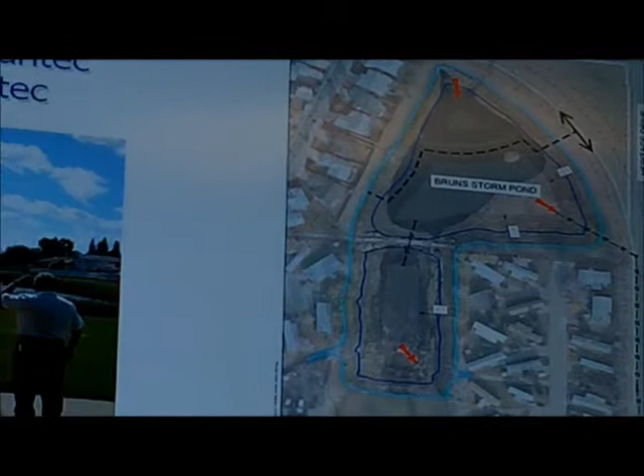Thank you, Matt. Mayor and Council, I'd like to thank Council for inviting us here tonight to share the results of our stormwater study and the path forward to resolve a lot of the issues that have occurred in Lacombe with the recent flooding. With me is Brad Dartis, one of our senior stormwater management experts, who will go through the presentation. We also have Mike Mushins, one of our senior municipal engineers who has participated in this study. They also attended the open house with residents a couple weeks ago. I'll turn it over to Brad. Mike and myself are here to discuss anything after the presentation. I look forward to questions.

You bet. Just before you do that, I want to welcome you, Todd and Brad. Thanks for coming out tonight. I know you've got two spots on the agenda here. What we'll do is bring this one forward, and we have a public hearing at 6:30, and we'll bring you back for your second one after that. So welcome, and looking forward to hearing from you.

Thank you. Good evening, thanks for having us. My name is Brad Dartis. I'm here to talk about the 2012 Stormwater Management Plan, and also how that leads into the 2012 Capital Works Plan. We'll start with some background on the flooding issues the city's been experiencing, then go into detail on the 2012 Stormwater Management Plan, and give more detail on the Capital Works Plan.

The goals of the Stormwater Management Study are to increase the level of service for both stormwater and sanitary servicing, mitigate the potential for property flooding, and also support overall environmental stewardship.

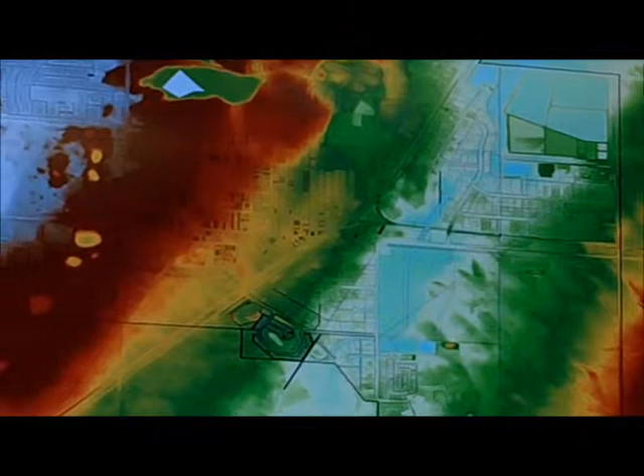Part of the model construction was we took the topographic data, which was actually from LiDAR data, along Wolf Creek there, and then as you go to the west, the red areas - that's the higher parts of the city.

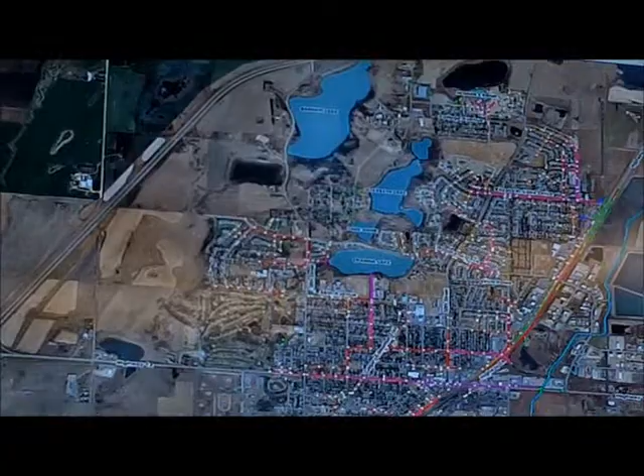The next step in building the storm sewer system, the minor system, we created the pipe elements in the model.

That one shows the entire minor system for the entire city, so of course it's hard to make out too much on that.

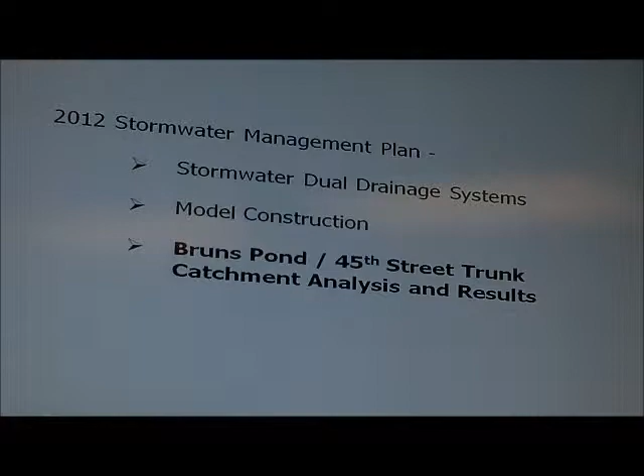So now we'll go into the specific analysis that we did of the Bruns Pond and 45th Street trunk. That was the system that was targeted for this year's capital works.

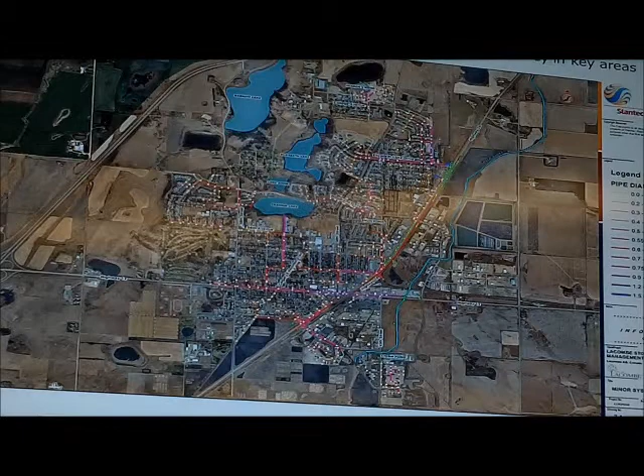Sorry about it, it wants to keep going backwards on me once in a while. I don't know what I did. Scrolling forward and then scroll the other way. I'll just scroll from now on, thanks.

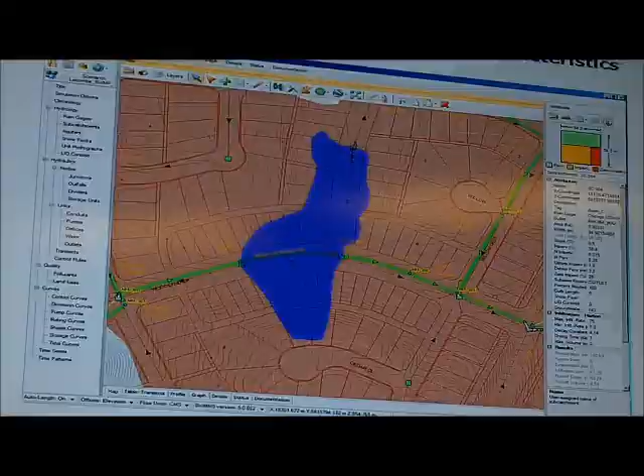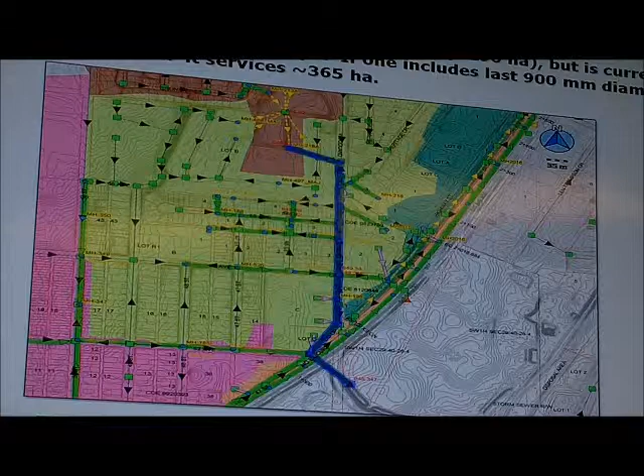All right, so the 45th Street trunk services about 290 hectares, but it's currently a 600 millimeter, or 2-foot diameter, pipe. And if you include the last pipe run, going northwest to southeast that crosses Highway 2A there, that pipe is 900 millimeters, and if you include that pipe run, then that trunk services 365 hectares.

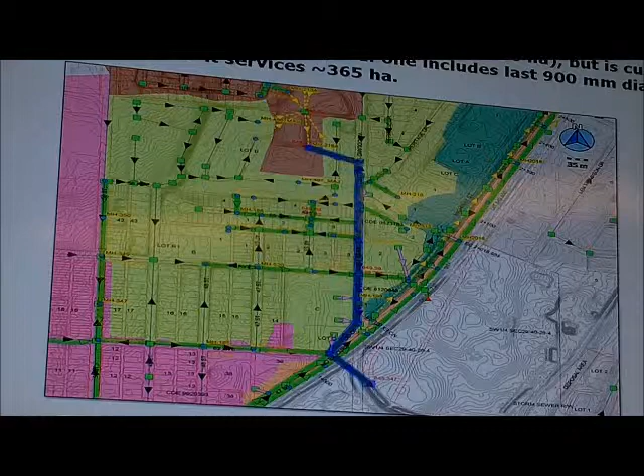So if you go to the next slide, in the model, the area highlighted in blue is the 290 hectares that the 2-foot diameter pipe services, and if you include the last 900 millimeter pipe run, then it also includes that pink sub-basin there. So that is quite a large area to be serviced with a 2-foot diameter pipe.

So it was obvious that we needed to analyze that further to see if there were any issues associated with it. So the next slide, we're going to show a profile along this alignment here, the one highlighted in blue. That's the 600/900 millimeter pipe trunk.

So this is the results from a modeling run for the 1-in-100-year design storm, which is what you would typically design an urban storm drainage system for. And so it shows the pipes in there, full of water, of course, and then it shows each of the manholes going up to the surface there.

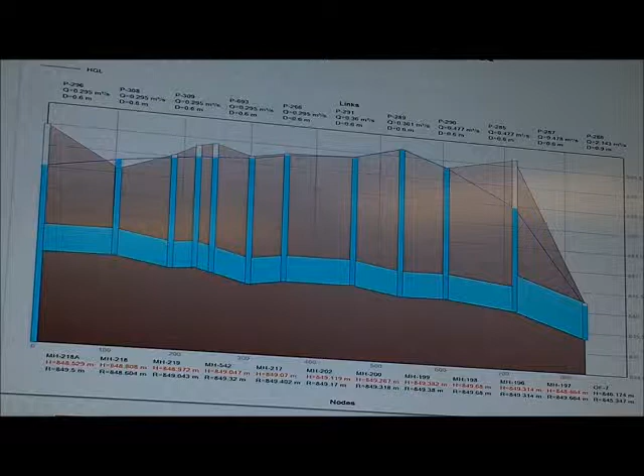There's also a light blue line that traces through the top of the water surface in each of the manholes, called the hydraulic grade line of the system. That's basically where the ponded water surface occurs along that particular profile. So as you can see, it's right up to the surface for most of that pipe run, and that doesn't leave a lot of capacity for stormwater to get into it and be conveyed away.

So what we have modeled is the addition of a new storm trunk that pretty much goes down the same alignment. It goes a little bit further north, up into Bruns Pond, along the roadway rather than through the trailer park there. This proposed trunk's southern half is about a 1200 millimeter pipe, so about a 4-foot diameter pipe, and towards the north we're pretty confident we can reduce it down to a 900 millimeter pipe, so about a 3-foot diameter pipe.

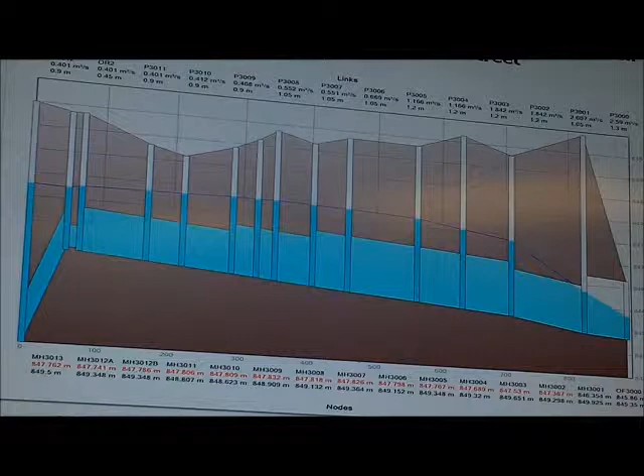So the next slide shows the model run results for the new trunk. As you can see, the hydraulic grade line with this new trunk installed is now about 1.5 meters to 1 meter below the surface, so that gives much more opportunity for water along that trunk to get into the trunk and be conveyed out. It's a much better situation, of course.

Next we'll show a profile through this part of the trunk that goes down 55th Avenue, because as everybody's aware, 55th Avenue in the Meadows was an area that was particularly hit hard by the flooding. On the right there are 2 pictures from the July 11th storm. The top one is looking west down 55th Avenue, and the bottom right one is looking west down the lane on the north side of 55th Avenue.

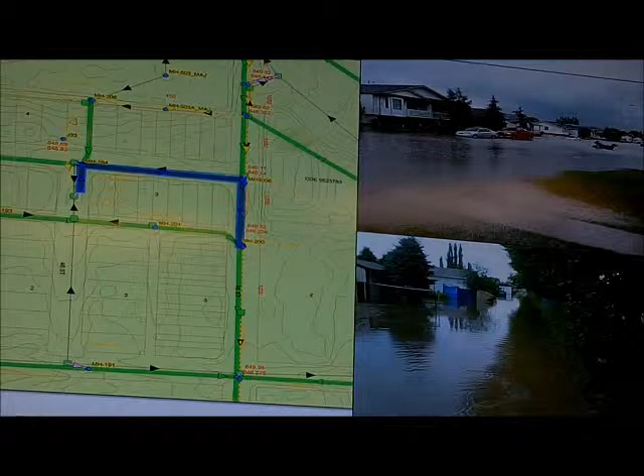So we'll go to the next slide, and this is the computer model results along that profile for the existing system. Again, the hydraulic grade line is right up to the surface. There's one trap low at the intersection of 55th Avenue and 46th Street, and the model suggests that for the 1 in 100 year storm, that trap low is about 55 centimeters deep, so almost 2 feet deep.

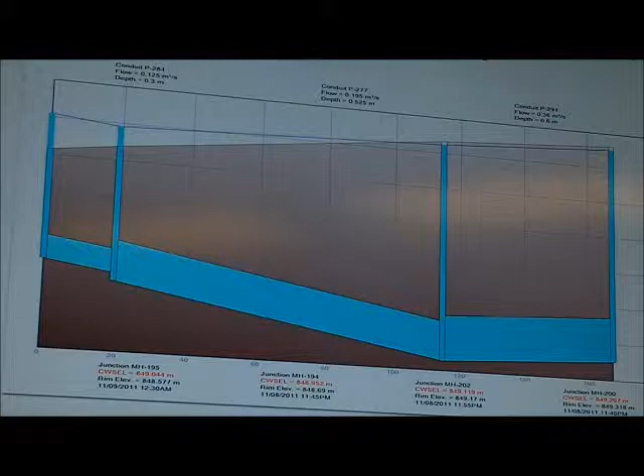So go to the next slide. This is the model results for the 1 in 100 year storm with the new trunk in, and again the hydraulic grade line is vastly below the surface for most of it. At that trap low at 46th Street and 55th Avenue, it goes from almost 2 feet deep down to about a foot deep.

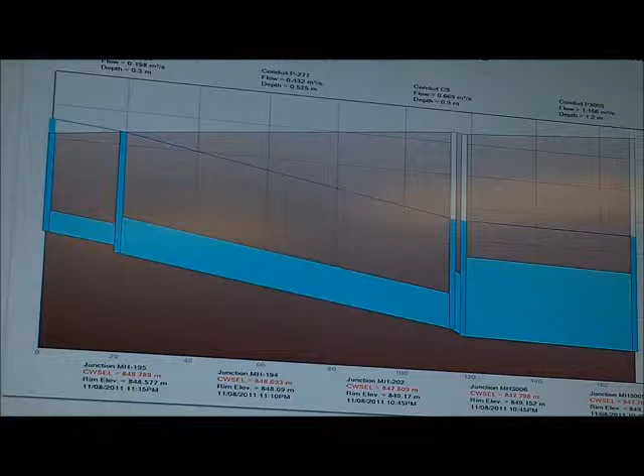And a foot deep is a very common criteria to design for. It's very common for roadway trap lows to be designed to have a foot of water in them for a 1 in 100 year storm. So the fact that the system is more or less being designed to have a foot of water for the 1 in 100 year storm shouldn't bother people, because like I said, it's a common criteria to design for.

So for the next slide, this shows the ponding extents in Bruns Pond and again in the Meadows for the existing system for the 1 in 100 year event. You can see Bruns Pond is spilling over into the trailer park, and in the Meadows that trap low has a lot of water in it, and it's quite a large trap low.

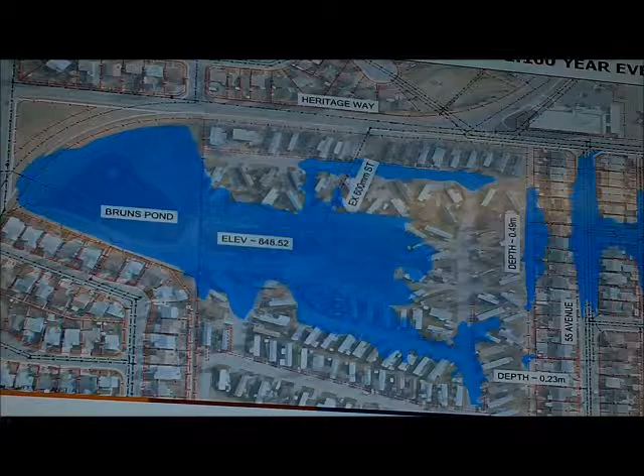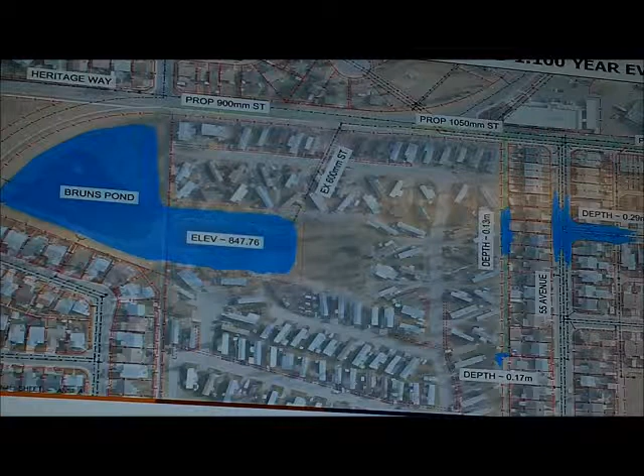Now we'll talk in a little bit more detail about the Capital Works program. Phase 1, again, is the 45th Street trunk upgrade. From this figure, you can see the southern half is about a 4-foot diameter pipe, and the north half is about a 3-foot diameter pipe.

We're also proposing a new storm main that goes into the lane on the north side of 55th Avenue. Those are relatively smaller pipes, 300 millimeter and 450 millimeter diameter. And then at the southern end, we're looking at about a 1050 millimeter pipe to go under the Highway 2A and the railway tracks there.

The reason being we want to make that pipe a little bit smaller, of course, without compromising the overall performance of the system, because the construction under 2A and the tracks is going to be a trenchless installation, so that is relatively expensive compared to the rest of the installation. So we want to keep that pipe size down as much as we can.

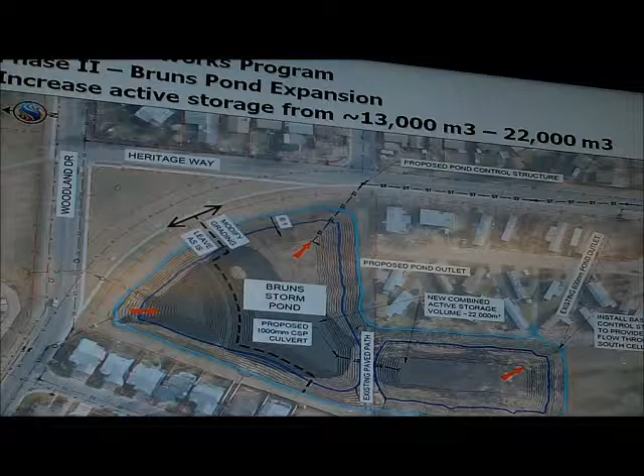Public education is often the key to addressing I&I issues. I&I isn't something that you can address in one construction season. It generally takes 10 to 15 years for a municipality to gradually chip away at it and improve the I&I conditions.

And that's why public education is such an important part of it, because a big part of it is getting the public to fix some of the drainage conditions on the private lots.

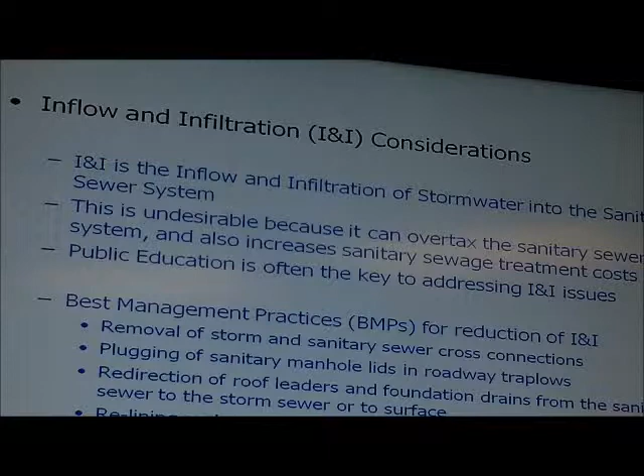Some of the best management practices, or BMPs, for the reduction of I&I are the removal of storm and sanitary sewer cross connections. So in some places you might have catch basins that are connected to the sanitary sewer system.

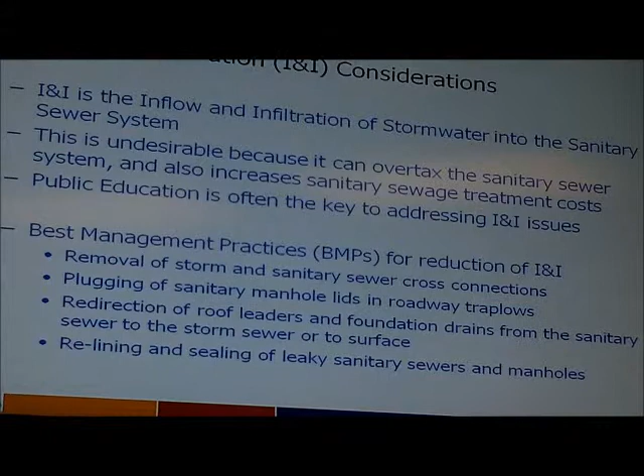So you would remove that connection and connect the catch basin to the storm sewer system as it should be. There's also the sealing of sanitary manhole lids in the roadway traplows.

Like I mentioned, quite often during an intense event, there'll be ponding of about a foot in depth that'll occur in the roadway, and if you have sanitary manholes in these ponding areas, then you can get a lot of inflow into the top of the manhole. So you want to seal off the top of the manhole so you don't get that inflow.

There's redirection of roof leaders and foundation drains from the sanitary sewer system to the storm sewer system. This is more of a problem in older developments. Sometimes you'll have the roof leaders going right into the ground and tying into a sanitary service.

So you would disconnect that existing connection to the sanitary service and have the roof leaders just draining onto the surface, onto a lawn.

A pervious area is preferred because then you get more infiltration of that runoff rather than it just going right onto the street and into the impervious part of the system. And then foundation drains, again, they'll quite often...

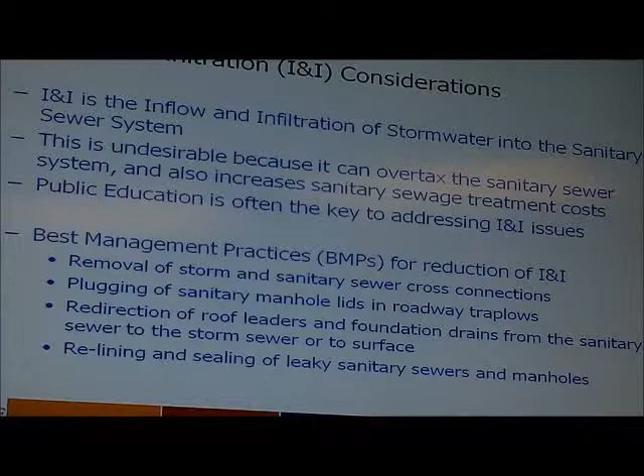Sump pumps will often discharge into the sanitary service, so it's more desirable if you can reroute that and have it pump to the surface rather than into the sanitary system.

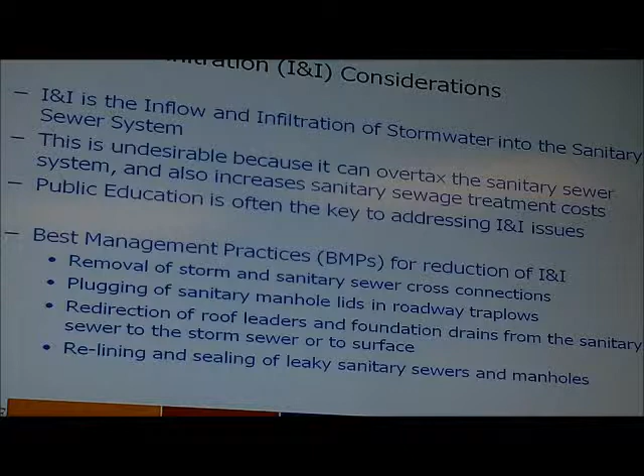And then there's the potential relining of older sanitary sewers that are, quite often if they're older, they're starting to crack and degrade.

Or they just, back 30 years, they weren't as leak proof as they are now.

The joints are a lot better now in the sewer mains that are installed now than were 30 or 40 years ago. So you can reline those older pipes to decrease the amount of infiltration that gets into them. Same applies to the manholes.

So what's going to make this project a success is...

Todd, did you want to talk about this one? No, go ahead, Brian. I know you like this slide.

Anyway, the keys to success are a good partnership between the consultant and the municipality, having a flexible yet clear vision.

Getting the community involved at all stages of the project, and also educating them where possible about the way typical stormwater systems and sanitary systems are designed.

The way they're intended to perform, and then communication is key throughout the project with the various stakeholders.

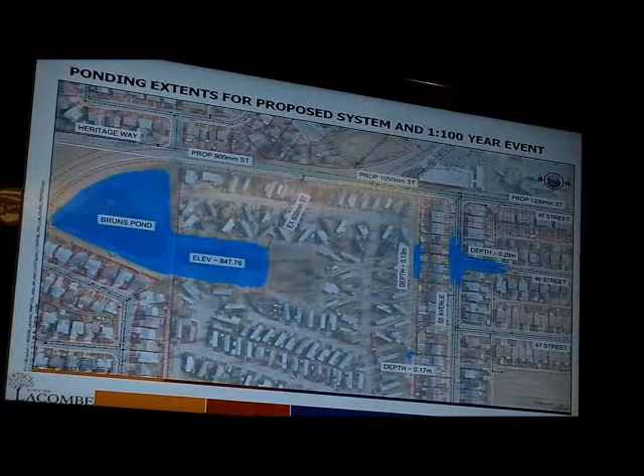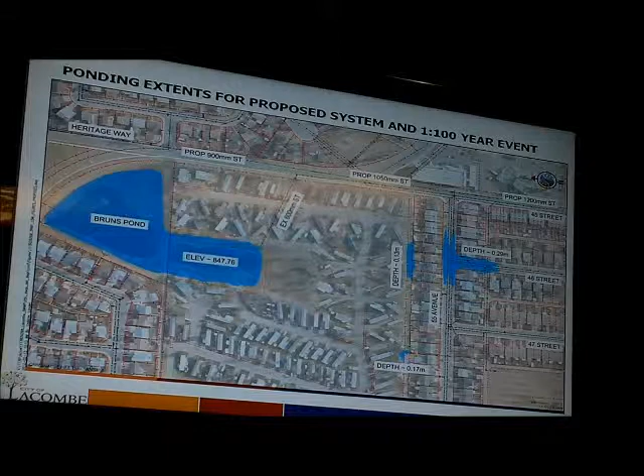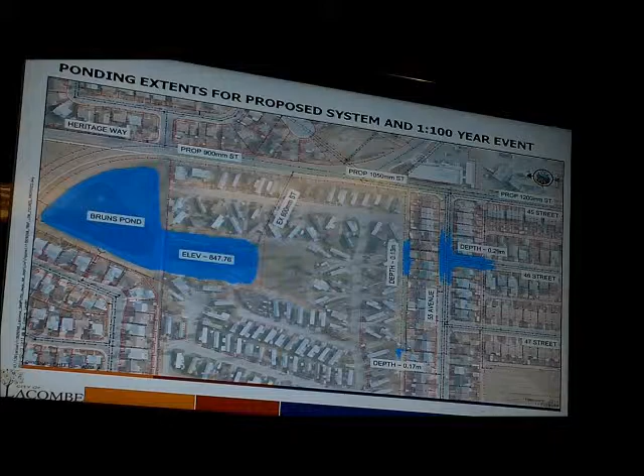Okay. So certainly a more enviable looking situation than what we had earlier this year for the water level. The title you have there is ponding extents for proposed system, so that's with Bruns Pond excavated? Yeah, it's with both upgrades, the trunk and the expansion to Bruns Pond. Okay, because initially we had talked about some culverts extending underneath there, removing the sidewalk, a substantially bigger excavation than what's indicated there. So this is the completed, excavated version? Yes. So we'll be looking to Mr. Gowdy for some cost savings there, because it looks like substantially less work than what we'd initially discussed, so that's a good thing.

I was also wondering if the proposed items, specifically the larger pipe twinning that you've presented as solutions to our problems, conflict in any way with the city's agreements with Alberta Environment for outflow rates and capacities?

Because it's a retrofit situation, Alberta Environment isn't going to be as sticky about if you're meeting a certain release rate. They're just going to be like, oh, people are getting flooded. Oh, okay, so what's your solution? Fair enough, kind of thing.

Like, they're more strict in terms of release rates when it comes to new developments because it's a lot easier to build the pond into the development that allows you to meet a certain release rate. But when you're in a retrofit situation, as we are here, it's often not that easy to find the land to put a pond in downstream so that you could meet a certain release rate. So Alberta Environment isn't going to be too sticky about release rates on this.

Okay, well that's encouraging to hear, because that's certainly an item that I had brought forward before and was a little concerned about, so that's good to hear that that's been addressed. Thank you.

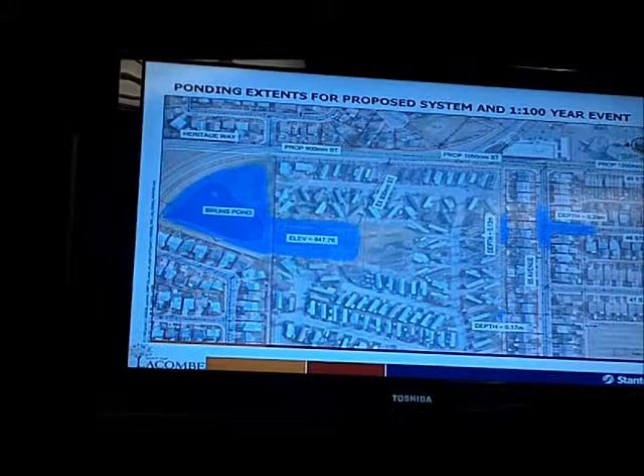just to highlight the areas where the system's capacity is already stressed, so that you can plan that into your future development, basically. So there'll be those kinds of figures in the report that help to educate you as to where your system is stressed already. So I think what you're really asking, though, is that this model is going to become a working tool both from the planning end of it and from the engineering end of it.

So let's say there's a major redevelopment in downtown 10 or 15 years from now, then you can use that model to look at how the existing system is going to work, and if you're going to do any upgrades or replacement, what needs to be done at that time. So as Brad said, it's broken up into basins. Typically your basins don't normally change. You can interconnect basins and do different things in the future as development or redevelopment occurs. So this tool will give that to you.

It's GIS based, so everything can be imported into any GIS software and any GIS platform that you have. It's expandable. It's used not just for the existing city of Lacombe, but say you get another application for another quarter section, all of that can be bolted onto the model at the time, and through your servicing standards, Matt and his team can request that be done as part of that servicing study and modeling. So it's going to be something just like a water model, just like a sanitary model, that can be maintained and expanded.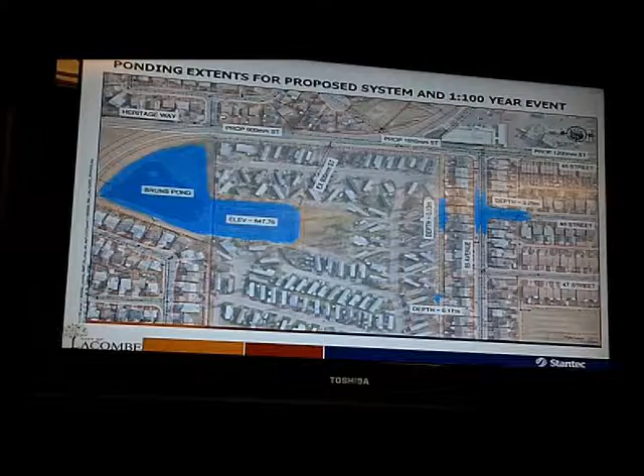And not that I can put your mind at ease, but if we're going to do this upgrade for this section of the city, it's not that you're going to have to come back and do it 2 years or 10 years or 20 years from now. There's always going to be constant upgrades to the infrastructure, and as long as the model's updated, you'll be able to stay ahead of the curve.

I did bring up one comment about changing storm events, and obviously we hope it doesn't rain too much here in central Alberta, but there are some things that are changing as the years go on as well. But there should be enough robustness in the upgrades that you're not going to see something that's going to create problems in the future.

Thanks, gentlemen. You do put my mind at ease a little bit in that we are looking at the proper modeling, and I hear the word GIS, which makes Michael very happy, that all of these things can be integrated, and that we've put a lot of work and effort into it. Another thing I heard earlier was that we don't know where those cross connections are, and I guess this will be built into our system as we go forth, as we find them. So it will help the whole picture. So thank you. Councillor Connick?

Thank you, Mayor Christie. I've got just a couple of questions, if I may. You speak to how this is phase one, and maybe this question is a little premature, but can we look forward to any other expensive phases, or are we going to wait till the rest of the report is done, or what's your inkling on that first off? Again, I'll let Brad go first.

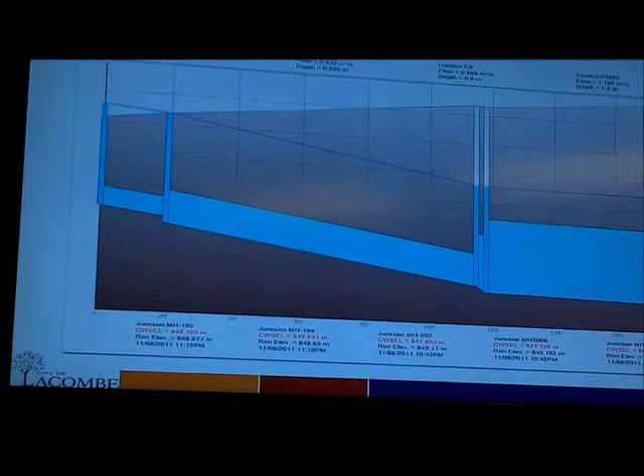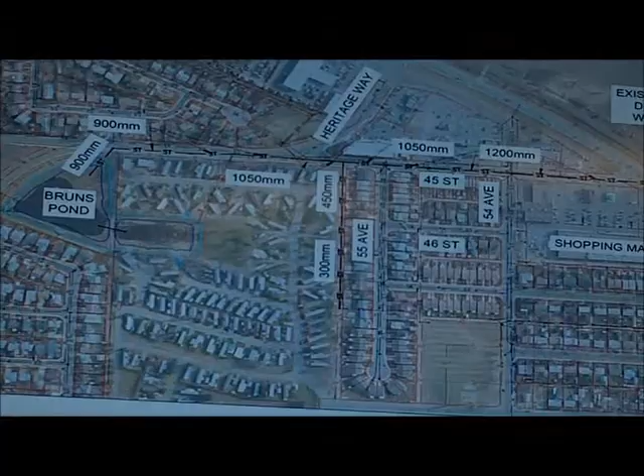Yeah, if I have a little overview here, I don't know where it went, but if we went to that hydraulic grade line, I don't know if Michael can find it quickly, you'll see that it's just like with those ponding depths. When there's ponding, if we're allowed to have some ponding there, and if the grade line is steeper going across the highway, then you don't need as large a trunk. So we'll make that final determination through the detailed design, dotting all the i's and crossing the t's relative to the actual final design that will go out for tender.

And then constructed this year. So you could potentially go to a 1200 if you discover in the final design that maybe the 1050 isn't the best idea. It could, yes. Oh, so then our costs could go up, or the costs that you've roughly given us, we'll take that into account. The original cost that we gave you had a budget for a 1200 pipe going the full length.

Okay, so already just the north half is in all likelihood going to be reduced down to a 900 and a 1050. So there's already, yeah. So we still think that the pricing we gave you is still reasonable. Thank you.

Councillor Creasy? Thanks, Mayor Christie. I just had one other question, and you had alluded to the fact that we can bolt on additional areas or whatever as those come on stream for the city to this model, which is certainly an economic way to go. And I was curious, with

basically an electronic format of this, does a copy of this become ours, or does Stantec own the model, how does that all work? I'm sure you can appreciate that engineering firms change and get bought out as time goes on, and I just wanted to follow up on that.

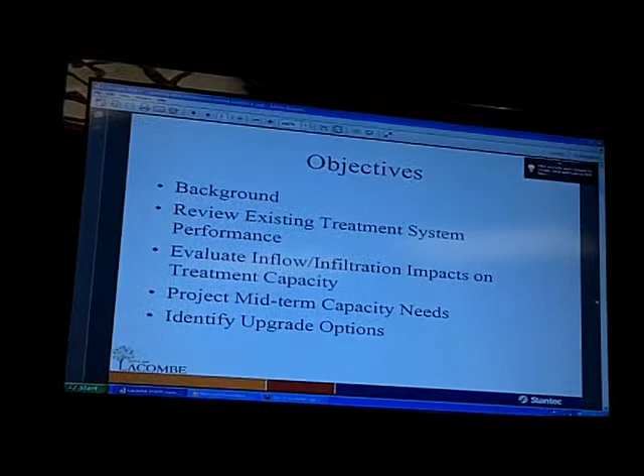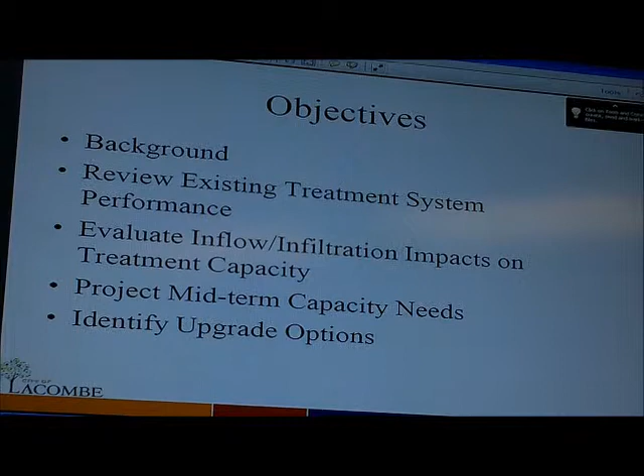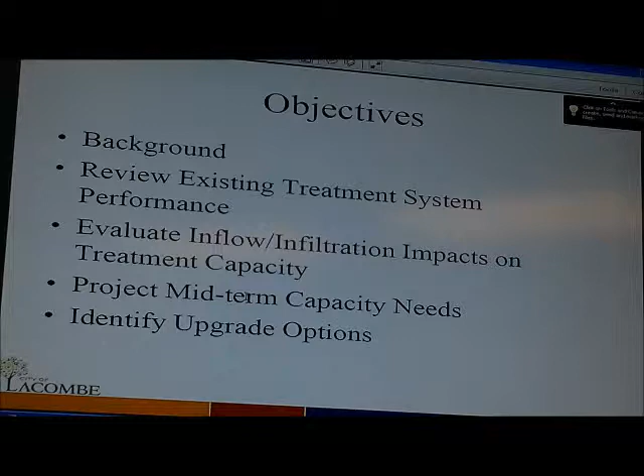So here are the objectives of the study: review the background of your existing wastewater treatment facility, assess its performance given how it should be performing — generally referred to as the overall efficiency of the system — evaluate the inflow and infiltration impacts on treatment capacity broadly for the city as a whole, what that inflow and infiltration is doing to your wastewater plant, then project midterm capacity needs, about that 10-year horizon, and what upgrade options are available if needed.

For background, we started from the 2009 municipal census, carried it forward at a 3% annual growth rate — not overly aggressive, but reasonably conservative, right in the middle. You're a member of the Central Alberta Regional Wastewater Master Plan, which you endorsed a number of years ago. That plan calls for, over the long term, being part of this regional system for centralized treatment at Red Deer. Acknowledging that, that's why we're looking at a midterm solution, because long term the goal is to send your raw wastewater back to Red Deer for treatment.

Currently, your wastewater plant is an aerated lagoon system, which is very common in communities your size. Generally, once you hit about a 20,000 population horizon, Alberta Environment forces you to go to a mechanical system.

Aerated lagoon systems are overall great operationally, beneficial, and not overly onerous. There's lots of storage capacity on site. The negatives are if you have a process upset, it can take a long time to work its way through the system. Other negatives are the large footprint required, so if you don't have room to grow, you're hamstrung, which is a possible issue for you long term.

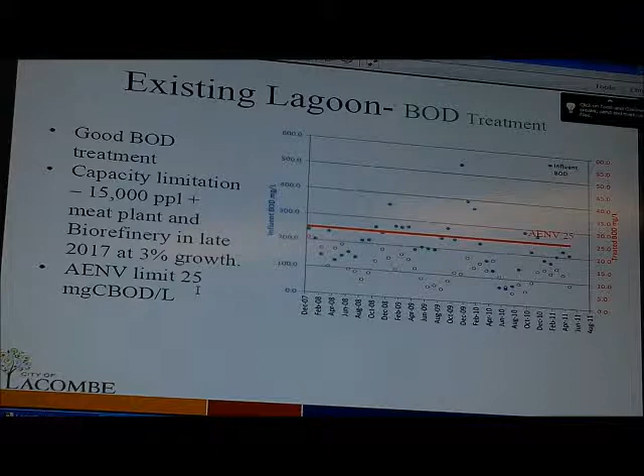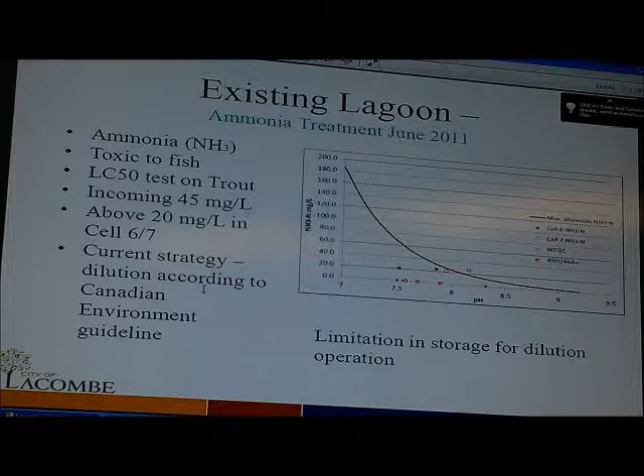The next big potential issue is ammonia treatment. Ammonia is not in your Alberta Environment treatment license right now. However, it's a cause for concern for the future for a variety of reasons: it's toxic to fish, there are federal DFO issues, and the Canadian Council of Ministers of the Environment has guidelines that we're supposed to maintain.

The LC50 is one of those federal guidelines. It's how many trout die when exposed to the ammonia for a certain amount of time. What you see in that curve is where your ammonia should perform in order to pass your LC50. On the y-axis we have your ammonia concentration, and on the x-axis we have your pH.

With the filled circles and the empty circles, those are from your last two lagoon cells that can discharge into Wolf Creek. This was taken in June of this year, and the results show you're right at the line in a few of the readings, plus you're actually over it in one of the cases.

Downstream is your X's and your squares. This shows that the ammonia has become diluted into the creek as a whole. So immediately after the plant, it's a problem, but dilution in the creek makes it less so.

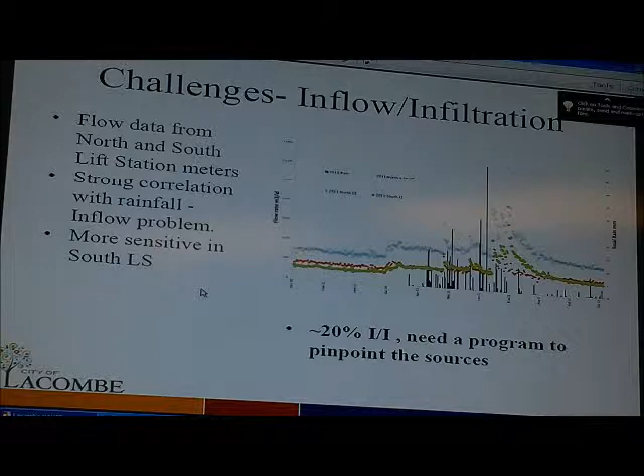Okay, so we took your flow and loading projections into account, as well as your current data coming in. So your per capita biological oxygen demand is right where it should be, a little lower than Innisfail's, a little higher than Olds. So you can brag to Innisfail about your BOD being better than theirs. Maybe you have a better diet. I'm not sure what the cause is exactly, but it's right in that normal range.

There, industrial, we looked at the meat plant and the biorefinery there, and took those results and incorporated those along with that 3% annual growth rate. A few causes for concern when we saw the biorefinery.

You look at the design BOD row about midway down there. That's 500 milligrams per liter. That's kind of high, and that's after their internal plant operations. So if there's an upset at that plant, that is a cause for concern. We think it could be in the order of 10,000 if their process fails, depending on how bad an upset, how much flow gets through. Something like that could be a major problem. So it's certainly recommended that that plant have a contingency plan, and that regular monitoring is in place to make sure it stays under control.

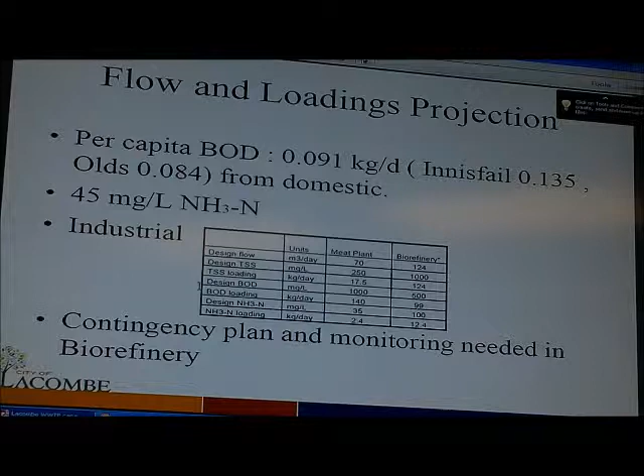So proposed interim discharge criteria. I just mentioned briefly Canadian Council of Ministers of the Environment there. Their broad standard is 25 milligrams per liter of biological oxygen demand, as well as 25 milligrams per liter of total suspended solids. On the TSS issue, you're fine. You've been fine up to date. You're fine with your projections going forward.

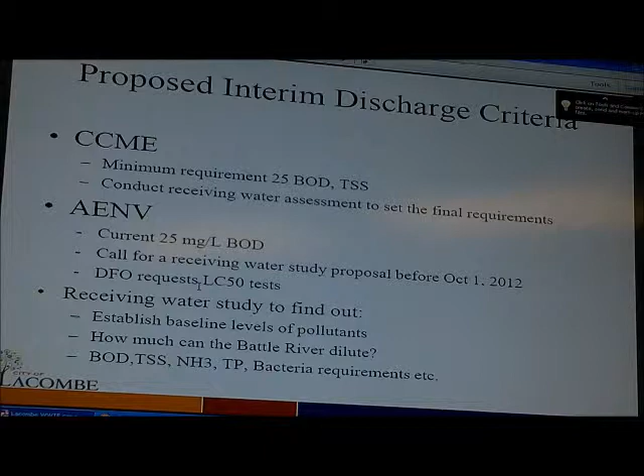Not a real concern. There's a requirement for receiving water impact assessment to define where you should be at with your other standards. So you see at the bottom bullet there, BOD, TSS, ammonia, total phosphorus, and those would all be set with receiving water impact assessment. That's also a requirement of Alberta Environment. It's in your current license that you have a proposal into them by October this year, just saying how your methodology for carrying out that study.

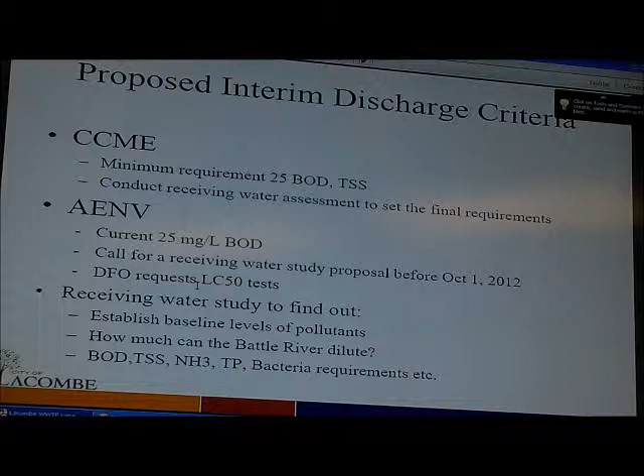It's not that the study be done itself. They might want you to do just a 1-year study. They might want multi-years on it. So that's a plan we have to develop together with the city and environment.

So your upgrade needs here, we talked about the BOD with the 15,000 population limit there. Your inflow and infiltration, calculated out, it's using up about 20% of your capacity.

What we're seeing right now, in a late spring issue like you had last year, your lagoons are getting very full by the end of the year, and if your ammonia levels are high like they were last year, it really puts your operators in a difficult situation where they want to be releasing that water to empty out your lagoons, but the ammonia is high. So you combine those two issues together and we have a potential problem. So we'd like to get a handle on that inflow and infiltration pretty quickly, bring down that storage in the system. In the summer, we're a little bit less concerned. This year, with all those issues, you got your lagoons very full to the point of needing to discharge, but you still didn't have to resort to that optional third discharge for the year.

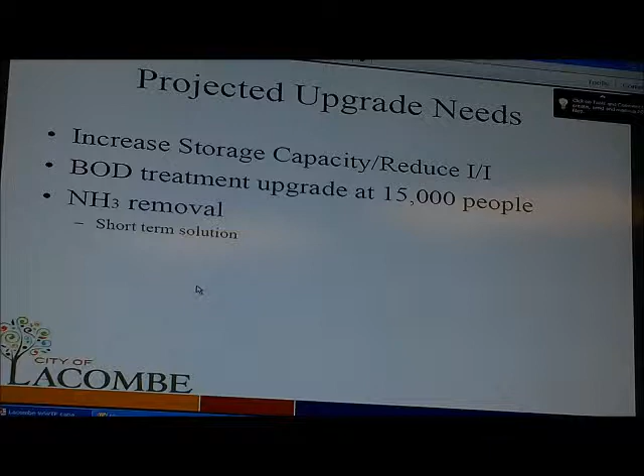Ammonia again, we got to find a short-term solution for that ammonia before the regional system comes on. So right now you're kind of at that cusp. Once that becomes a mandatory reporting requirement, you're going to need that solution in place.

So here we go through your ammonia handling options. So right now, in general, lagoon wastewater treatment plants are not very good at breaking down ammonia. Right there in that figure is how ammonia gets broken down with bacteria and temperature with their help into nitrates. If you have any questions on those ones, Johnny will field that because he has his master's and he's a lot smarter than us.

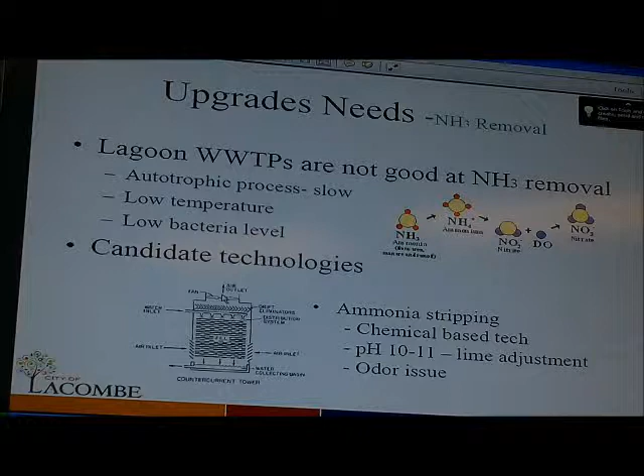But some candidate technologies identified. Ammonia stripping, it's essentially just addition of chemical to break it down. There are a few issues. It takes your pH of your water up a lot higher, not really good for the receiving environment. There are odor issues with it.

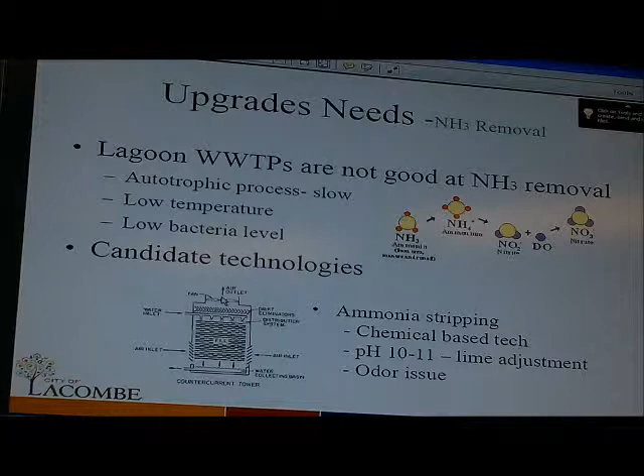Operationally, it's not very cost effective either, and it's really operationally intensive in how it has to be handled.

Aquamat, there are a couple of technologies similar to Aquamat out there. What it does is it provides surface area for the bacteria that help you break down ammonia, giving them essentially a place to live in your system. It's easy to install, similar to like a baffle curtain in a reservoir. You can kind of think of it that way.

The most northern application of it was in Columbia, Illinois. It achieved really good results there, 3 in the summer and 10 in the winter. Right now, Red Deer is trying to achieve ammonia of 5 and 10, summer and winter, so achieving that here is pretty reasonable. However, whether or not that's achievable in Lacombe, just because it's achievable in Columbia, Illinois, is unproven at this point.

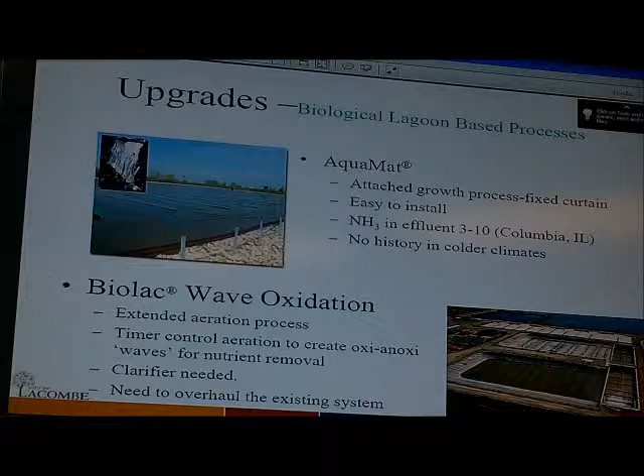So no history in colder climates. There's a similar technology out there, floating islands, that's been trying to apply itself in colder climates as well. You may have heard of that. Again, not really proven in climates such as this. Similar idea, again providing surface area for the bacteria so they can work on breaking down your ammonia.

The next one is the BioLac wave oxidation system. This one would be like an overhaul of your plant. Essentially, it's creating wave action in there to build up the kinetic energy, to help the bugs do their work. Problem with this one is it's a major retrofit of your existing plant. It changes the way your aeration happens there, and it takes down large portions of your cells through construction in the summers as well. So we like to avoid something that's as onerous on your plant as possible.

The SAGR system, submerged attached growth reactors. This thing is ingenious and it's really simple. It's essentially taking a lot of rocks, burying them, pumping water through it, and it's almost as simple as that. It sounds ridiculous when you say it, but it's been extremely effective.

It's an add-on system at the end of the lagoon. We have a schematic of how we could incorporate it here. We have some mulch insulation, and then, like I said, gravel and pumping some oxygen, let the bugs do their thing. It's been piloted pretty successfully in Lloydminster for the past few years. Definitely not foolproof, but definitely worth a good hard look here.

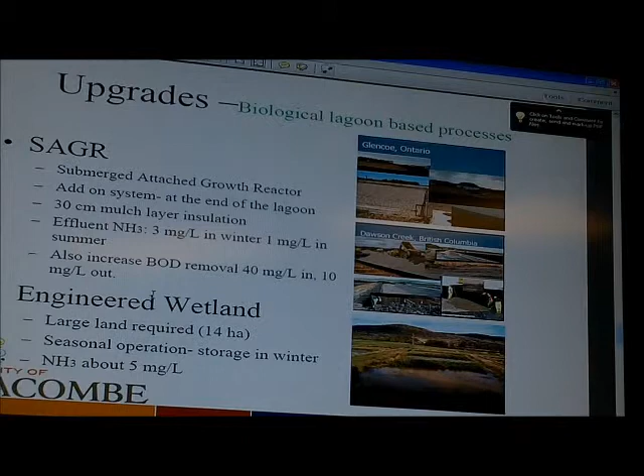Another option, engineered wetland. Once that's in place and the aquatic and biotic environment are taking over, that one's very operationally simple. It's letting nature do its course. You can't have your winter discharges, but right now you can't have your winter discharges anyhow, so you do need storage. Achieves your ammonia treatment goals.

We're in the middle of implementing one in Avonlea, Saskatchewan right now. Bad thing about the engineered wetlands though is it takes up a lot of space. At present your plant's pretty hemmed in there. You would need to be able to secure more property for like a major surface expansion.

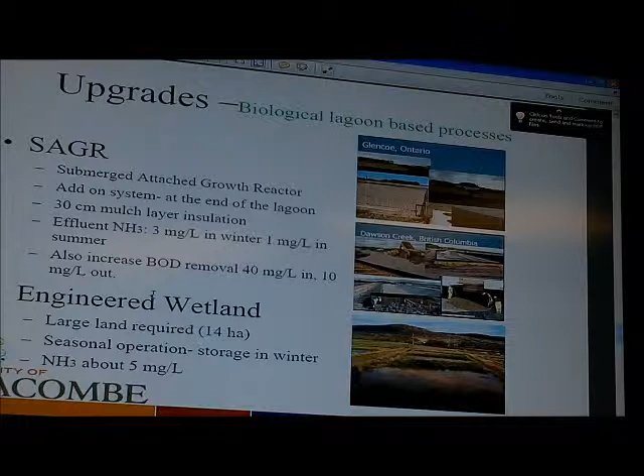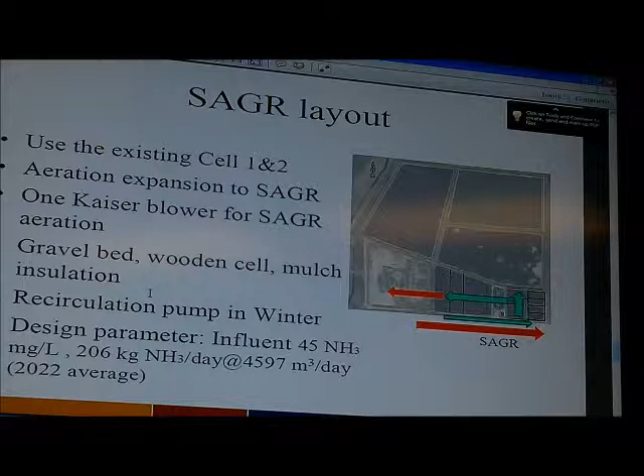In the winter, after your second blue arrow, the one heading to the left, you would then take that red arrow to the left and get a little bit more treatment before going through the SAGR system, and then it would go into storage.

You have existing blowers at your plant site that could be converted over to that use. I mentioned the simplicity of the system before, the gravel bed. Generally that gravel is just placed in wooden forms. It's almost ridiculously simple in some of those respects. However, it is a patented technology, unfortunately.

And then I mentioned the recirculation in the winter already. Design parameters there, pretty high influent ammonia. We're projecting there just to be a little bit conservative to make sure we can retain our effluent results.

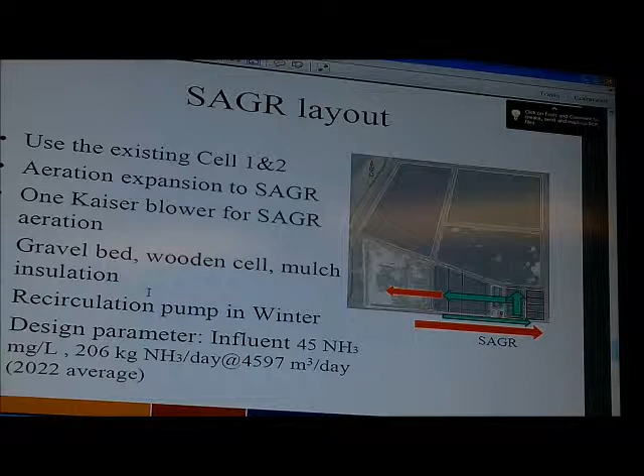So taking it beyond that period, making that a long-term solution is probably not the way to go. We'd probably be looking at doing something more permanent if you wanted it to last more than 10 years. Either that or we'd have to build a much bigger bed. The wetland, again, nature solution. It's great except for the need for space, which we're hemmed in at the current plant site. Costs would be reasonably comparable to what we're looking at for the SAGR.

A few other options we looked at, raw wastewater transmission. So starting the regional system up, taking it back to Red Deer, just projecting from that wastewater master plan from a number of years back, putting in the construction cost escalation from that time. We're in the $30 to $35 million range. It's definitely not a detailed estimate, but that's telling you your ballpark long term. There may be funding opportunities through the regional grants, but overall it looks fairly cost prohibitive without those grant formulas working for you.

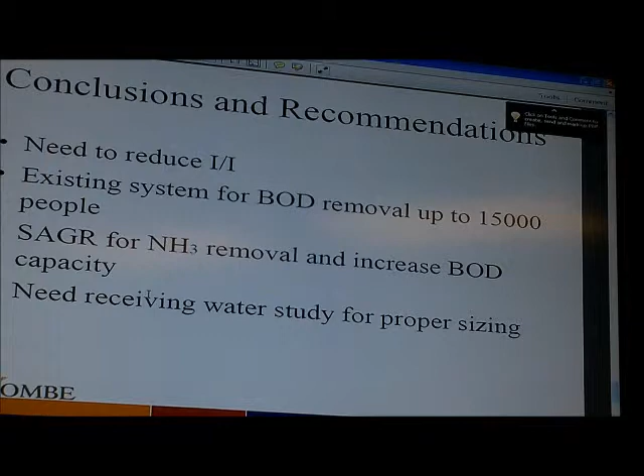We're recommending your SAGR system for your ammonia reduction. There is a knock-on improvement on the BOD as well. However, that wouldn't be why you're doing it. You'd be doing it for your ammonia. And your receiving water study assessment as part of your license, you'll want to be proceeding with that fairly soon. And we invite any questions.

Super, thank you, gentlemen. Questions? Councillor Creasy, I'm sure you've got Councillor Belsma's list there. Small list. Thank you. I was just curious with the I&I problem, do you have any data, is that mostly at the household level, or is this at the street level? Where does most of this occur?

Well, let me restart. The inflow component of it would typically happen in the house. The infiltration component will be leaky pipes, things like that. If you want to scroll back to what we're seeing with our rainfall events here. I can certainly appreciate that. I'm just curious as far as the overall volumes of both of them. Where do we get the most bang for our buck? Where do we need to identify the problems first?

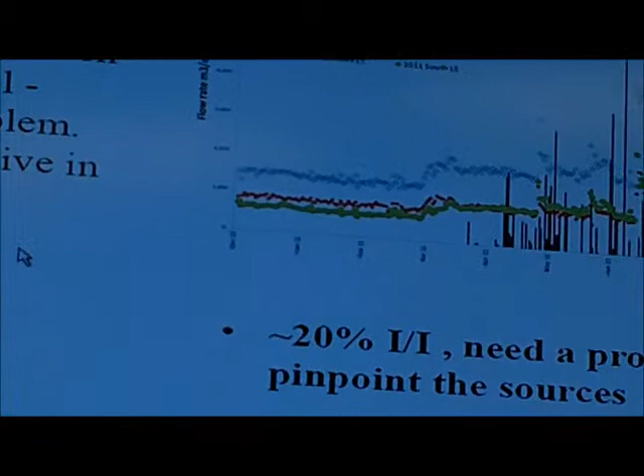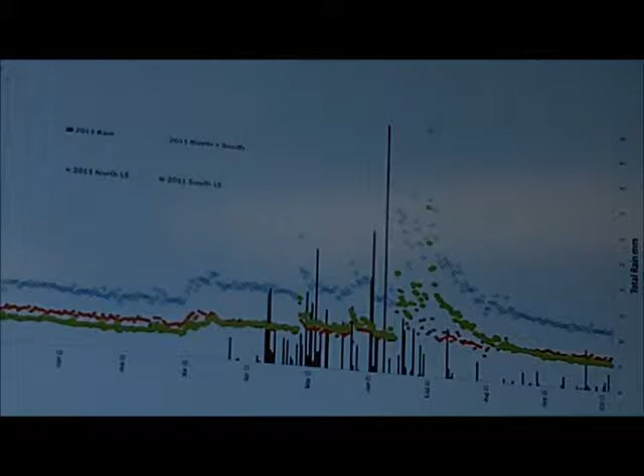We need to identify the problem first, and to answer that question more intelligently, what we are seeing is there's a definite peak. You get a big rainfall event, you have a big I&I event. To me, that says that you certainly have an inflow problem. However, the infiltration problem can happen more with high groundwater tables getting into your pipes. A rising groundwater table from a rainfall event can happen over the weeks after, and we are certainly seeing some of that as well. You're seeing that peak, and then your flows go back to normal slowly after. So to me that says you have both issues.

Okay. I'm going to jump in and add a few other comments as well. So Steve and I actually did an infiltration inflow study in the city of Red Deer for the East Hill area of that community, and what we have in the city of Lacombe is two lift stations that we can monitor the flows through.

So there's no other upstream data to know where the inflow and where the infiltration is coming from. So those are our 2 baselines. So when you look at the dots, those are the 2 lift stations and the flow going through them. In the one lift station and the north lift station, it kind of peaks out if you get too much rain, and that's why we're doing the improvements with the additional force main to improve capacity and conveyance.

But what ends up happening is with the inflow and infiltration, we need to back up into the system to understand where the issues are coming from. So in the city of Red Deer, we were able, through where the flow meters were, to actually determine a range of an area where we thought this inflow was coming from. And it took the city, I think it was a couple of years, Stephen, but they actually found a large cross connection between the stormwater and the sanitary system, and I think it was about 100 liters a second that was getting in there under the large storm events.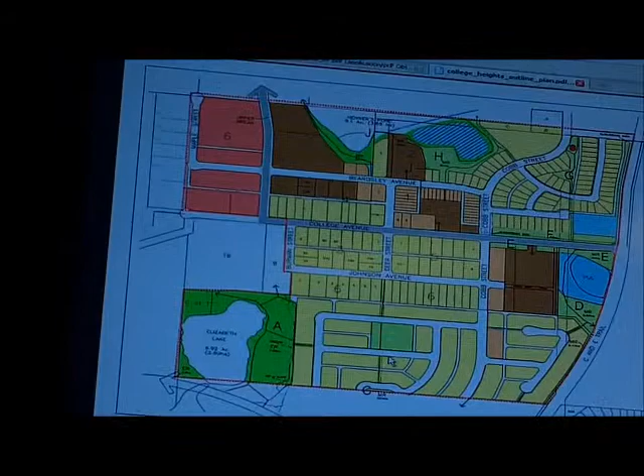The proposed rezoning meets the requirements of the North Area Structure Plan as well as the College Heights Outline Plan. There are maps for you to take a gander at. The applicant has paid the $1,000 fee to cover advertising costs associated with the notice. All the requirements meet the Land Use Bylaw, Municipal Government Act, North Area Structure Plan, Elizabeth Park Outline Plan, and College Heights Outline Plan. And we recommend a first reading be given and that a public hearing be held on March 12th at 6:30. Thank you very much, Jen. Discussion on that?

Councillor Creasy: I was just a little confused with this future designation labeling that we have on this area. Is this just a natural progression of a subdivision area like this? That's all it is. Okay.

I would certainly be happy to put forward the motion then that we go to first reading on bylaw 3064. Thank you very much. Any further discussion? All those in favor? So carried.

And I believe you're looking for a public hearing to be set as well, Jen? Yes, that's for March 12th. Councillor Connick: I would so move that a public hearing be held on Monday, March 12th, 2012 at 6:30 p.m. to consider bylaw 3064. Thank you very much. Any further discussion? All those in favor? So carried.

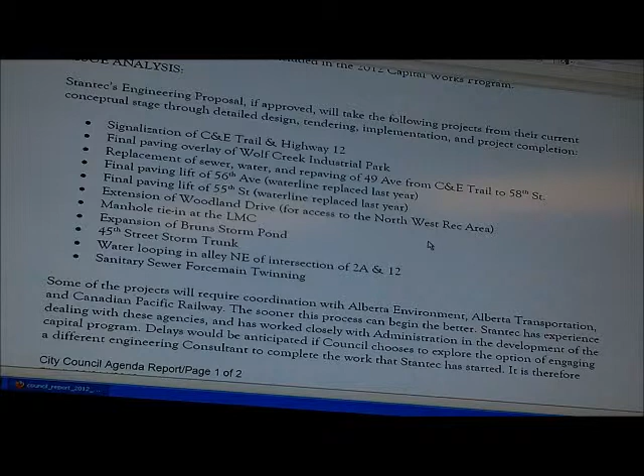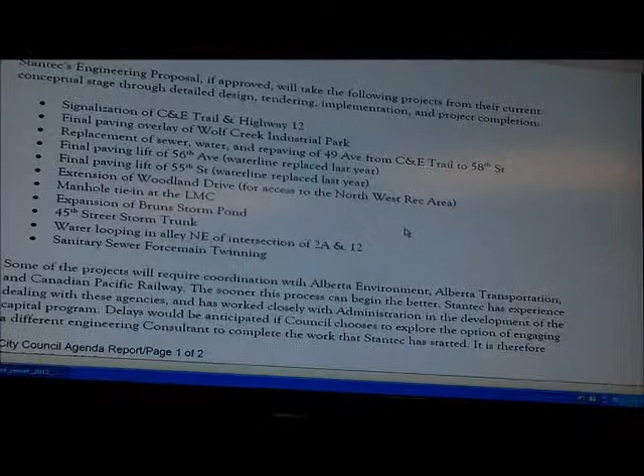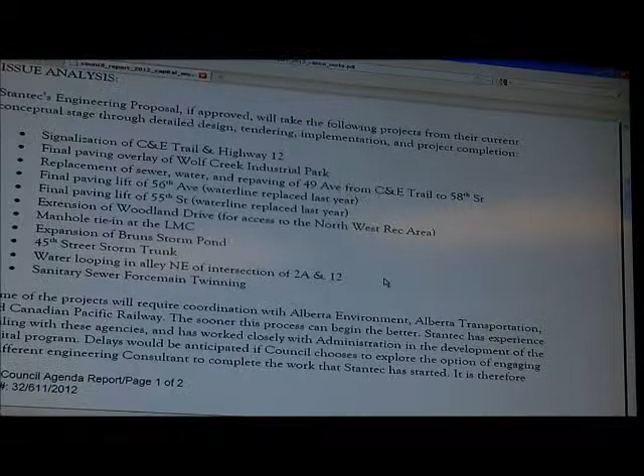So with this year's program, because of some of the concerns that Grant identified with Alberta Environment, there'll be coordination with them, there'll be coordination with CP Rail, as well as the usual utility companies like Fortis, that kind of thing. That level of coordination with outside stakeholders certainly drives up the work required by the consultants, and thus the increased costs that you're seeing.

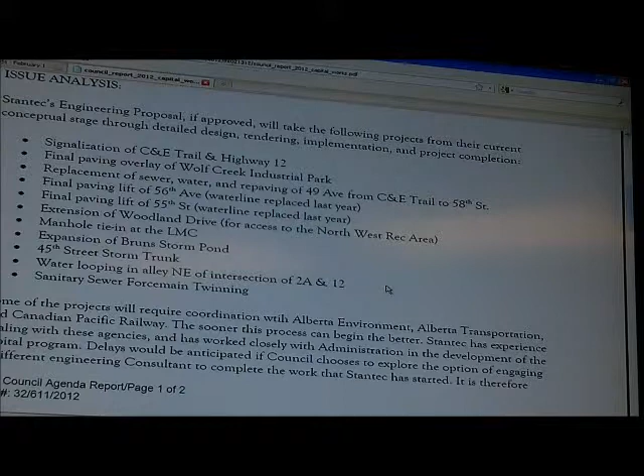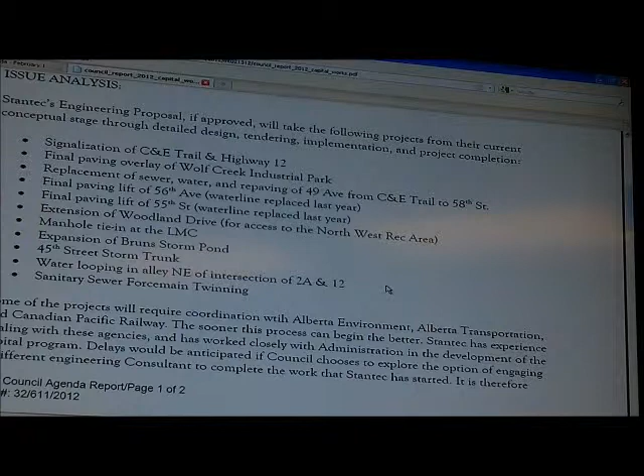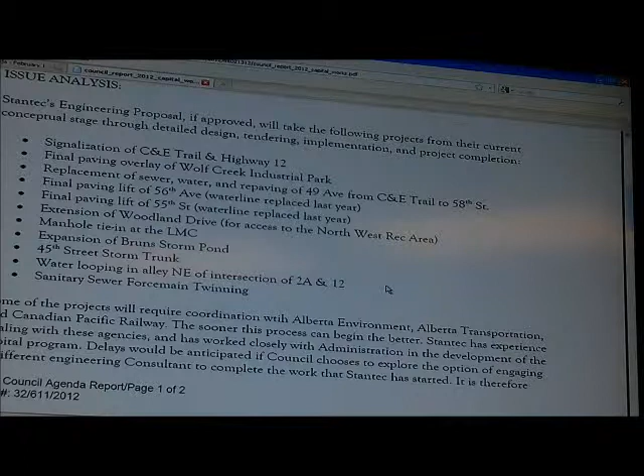I think, as I've said here, that it's well worth the increased cost. It's not something that we have internally the capacity to do some of that work. With the Highway 2A work going on at the same time, it's going to be a very busy construction season for us, and certainly we're recommending that council endorse this proposal. All right, thank you.

Councillor Creasy: I make a motion to grant administration and services agreement with Stantec Consulting for the provision of engineering services for our 2012 capital program. Thank you very much. Any further discussion? Questions? Seeing none, all those in favor? So carried. Thank you. Other than that, I think that brings it over.

That moves us down to reports. Councillor Foster. Thank you, Mayor Christie. I'll keep this very brief. Respect the MPC, the information was pretty straightforward. We're still...